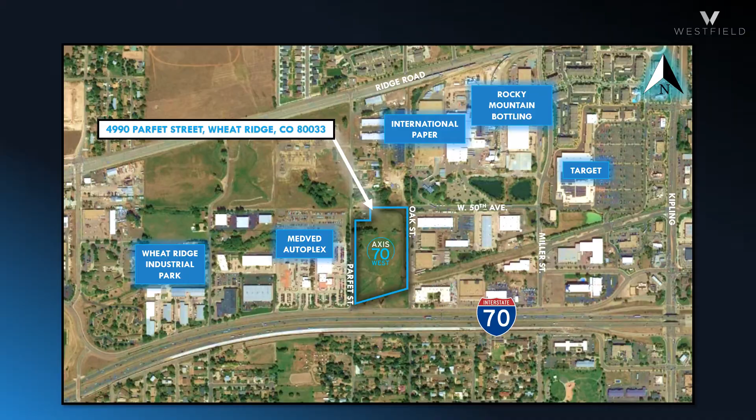The site is currently used as seasonal grazing pasture for John Medved's bulls and is only improved with perimeter barbed wire fencing and a livestock shelter in disrepair.

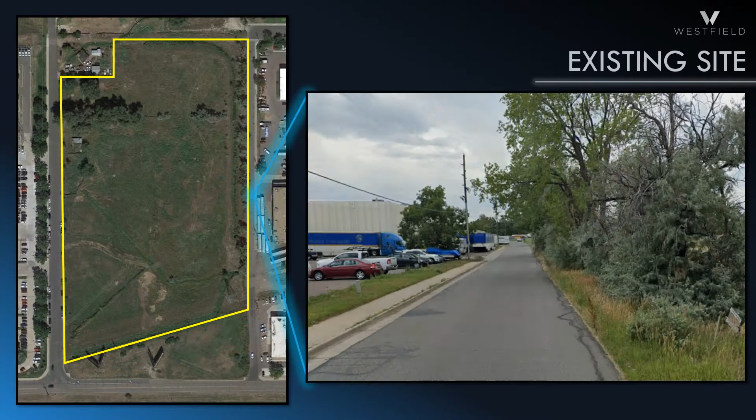It was most recently the subject of a rezone case in 2005 when the city approved an ODP designating the property as a planned commercial development with the purpose of expanding the Medved Autoplex with an additional auto dealership and related warehouse for parts distribution and auto service that was never developed.

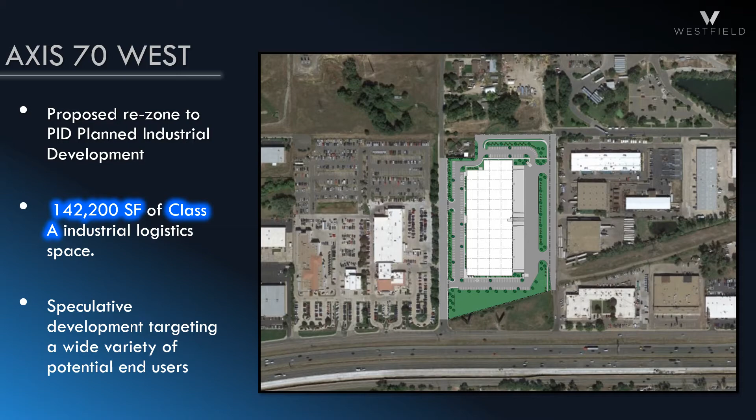We are proposing to rezone the site to a planned industrial development to facilitate the construction of a single Class A industrial logistics facility consisting of 142,200 square feet, with the goal of delivering a high-quality, aesthetically pleasing building to an undeveloped site that will provide employers the much-needed space to create local job opportunities for residents.

The project will be a speculative development with no specific end user in mind at this time. However, the intention is to provide a highly functional modern industrial building that will accommodate businesses of varying sizes and would largely target users that need logistics space that can be utilized for distribution, light manufacturing and assembly, showroom, sales floor, wholesale operations, as well as service and supplier-oriented businesses.

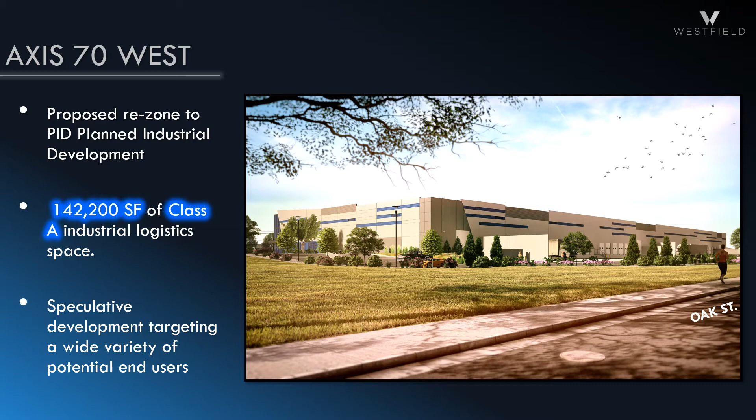As such, our ODP, as a planned industrial development, is based on the industrial employment zoning standards with a few modifications to provide for certain efficiencies and functional design elements that are required for large-scale Class A industrial logistics facilities like our proposed development to be successful.

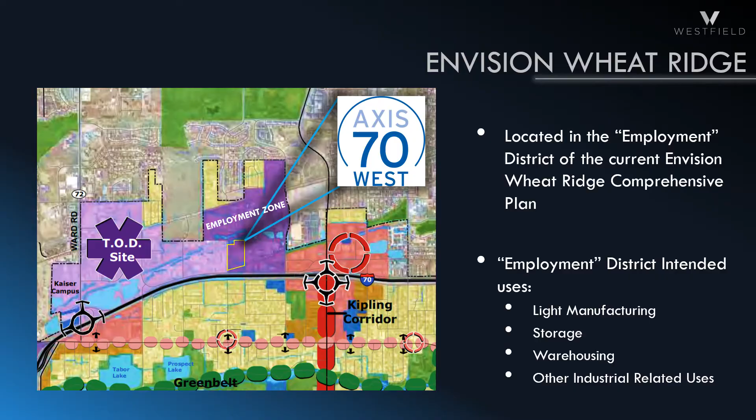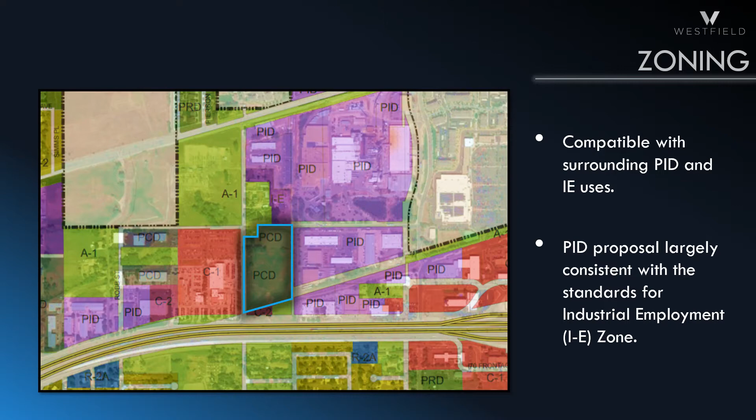We believe our proposed development will provide much needed and severely underserved industrial space in the city for the growth of the local business community and the creation of new job opportunities.

General rule of thumb in industrial today is that 900 square feet of new industrial space equates to roughly one new job. In that ratio at this building, that would equate to as many as 150 new jobs for the city. And those job types could be a wide range of business entrepreneurs, wholesalers, engineers, sales team, craftsmen, service providers, with potential pay ranges anywhere from minimum wage to 6 figures plus.

The buildings would have mixed use employment. They would have office components, some warehouse, some light manufacturing and assembly, again, depending on who the end users end up being. And then it would also significantly increase the tax revenue for the city.

So as an undeveloped parcel of land in 2018, the total tax bill was $19.18. And we estimate that in 2022 and beyond, at fully assessed valuation, our real estate tax revenue to the city would be $375,000 a year.

So to further demonstrate our intent with the proposed development, I want to provide some recent developments Westfield has delivered in the metro area and talk through our actual experience with these.

So first is Hub 25, a 4-building, 420,000 square foot park we built in 2017. It's located at the junction of I-25 and I-76 with very prominent frontage on I-25. It ended up leasing to 9 tenants, 3 of which were showroom wholesale users, 3 were light manufacturers, and 3 were distribution and fulfillment users.

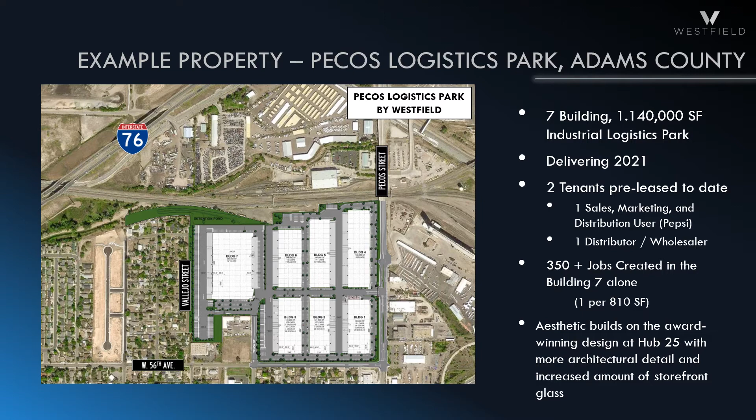Building 7 alone, housing corporate marketing, corporate sales staff in their office component, and then distribution of finished product in the warehouse, created over 350 jobs. That would be 1 job per 810 square feet.

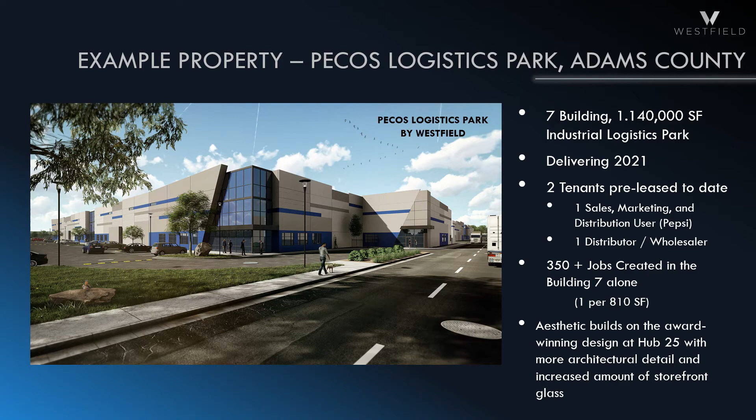Again, the aesthetics of this park builds on the award-winning design at Hub 25, but brings more architectural detail and increased amount of storefront glass. So our proposed development brings this same award-winning design and market-leading functionality to this site in Wheat Ridge.

The building is designed for the main facade to front on Parfet Street, but it will offer an elevated glass line and architectural design on the south end for first-class curb appeal along the West I-70 frontage road. The loading side of the building will front on Oak Street, facing the existing industrial buildings to the east, but screened and buffered by a 40-foot setback with ample landscaping.

With any logistics facility, the flow of traffic and primarily truck trips is always a key concern. With the guidance of the city's planning department, we decided to orient our building to put loading on Oak Street, which will focus truck trips onto West 50th Avenue to reach the Kipling exit on I-70. This path is the existing truck corridor for the employment district, providing safe and efficient ingress and egress that will work with both the current and future alignment and design of the Kipling exit.

In addition to the economic benefit our proposed project would create in jobs and increased tax revenue, the project will also design, construct, and fund—at significant cost to the development—a number of public infrastructure items that will benefit the city and our neighbors.

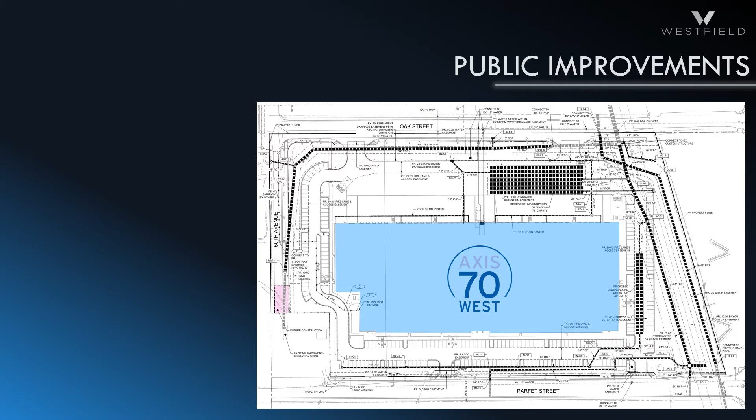The Ridge Road tributary, which conveys regional stormwater for Arvada and Wheat Ridge from the regional pond to the northwest into the Arvada channel, will be piped and undergrounded into a fully enclosed system, creating a safer and maintenance-free conveyance versus the open ditch that exists on site today.

We will also extend the Arvada Channel regional stormwater system through to the west side of the site to be ready for further extension when the city has the opportunity. The Bayou Ditch, which exists as an open ditch on site, will likewise be piped and undergrounded for a safer, more maintenance-free condition that meets current water decree and design requirements.

With regard to street improvements, the project would further the development of the city's transportation structure plan by extending West 50th Avenue across the north end of the site.

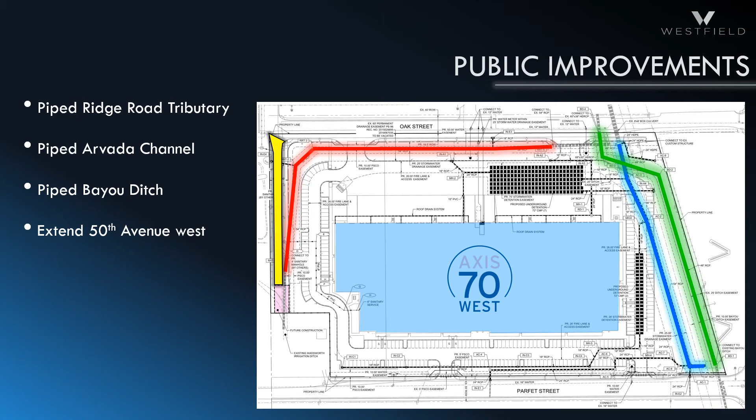We are proposing to dedicate 18 feet more of our frontage along Oak Street on the east side of the property than is required, to widen Oak Street to a 40-foot wide ultimate street section. This will provide the safe and efficient access and turning radius our trucks will need, while also benefiting our planned industrial development and the industrial employment user neighbors to our east and north who rely on Oak Street.

We will also provide curb, gutter, and sidewalk along Parfet, Oak, and the 50th Avenue extension, where none has previously existed.

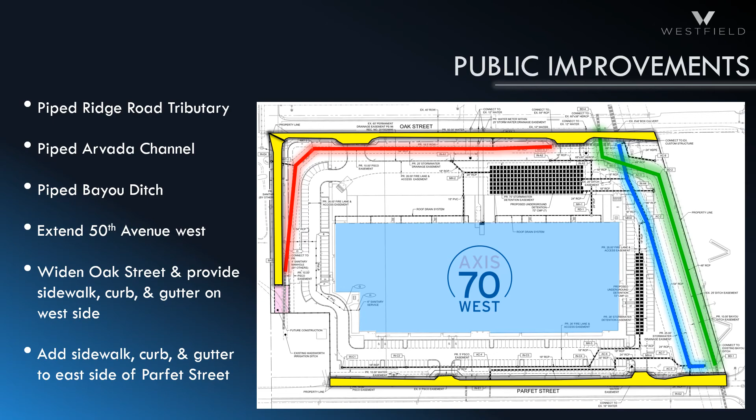With regard to landscaping and buffer zones, we hired an arborist to inventory the trees existing on site today. He determined that all are either invasive species, such as Russian olives and Siberian elms, or are not healthy and viable long-term, like the cottonwoods along Oak Street.

Our ODP does provide for existing trees to be replaced at a 2-to-1 ratio with new trees of desirable species for shade, canopy, screening, and quality. Code requires a minimum of 65 on-site trees; we have provided 101, plus 11 street trees in the extended 50th Avenue right-of-way.

With regard to landscape buffers provided, we are providing a minimum 15-foot landscape buffer along Parfet Street. At our northwest corner, code requires either a 6-foot solid fence with a hedge or a 15-foot wide landscape buffer. Our design provides both a 15-foot buffer and a continuous hedge with a 6-foot solid fence.

And again, on the east side of the property along Oak Street, where the loading of the building will be, we are proposing a 40-foot landscape setback with ample trees and hedges to screen the loading and utility side of the building.

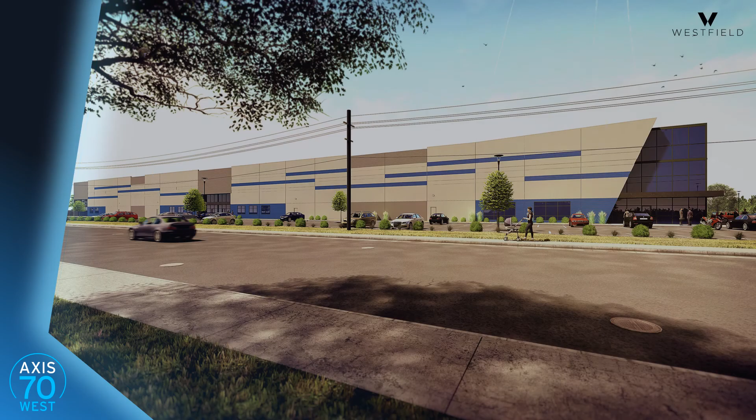We've taken great care to design and orient our proposed building in a manner compatible with and complementary to our neighboring properties. We hope and anticipate that the proposed development will be a valuable asset to the city, bringing an award-winning design to a prominent western entry gateway location in Wheat Ridge, providing increased tax revenue, public infrastructure improvement, and much-needed space for the business community to grow and create new job opportunities in the city.